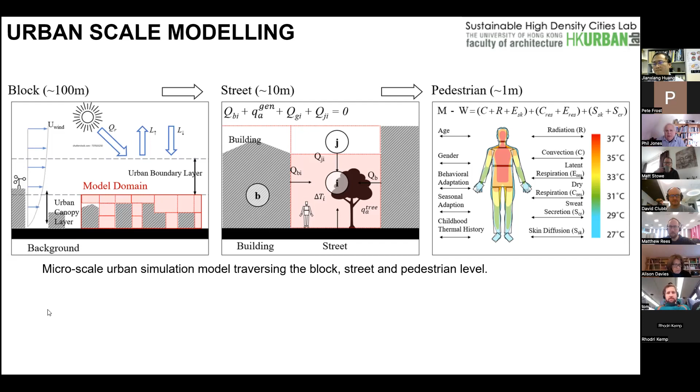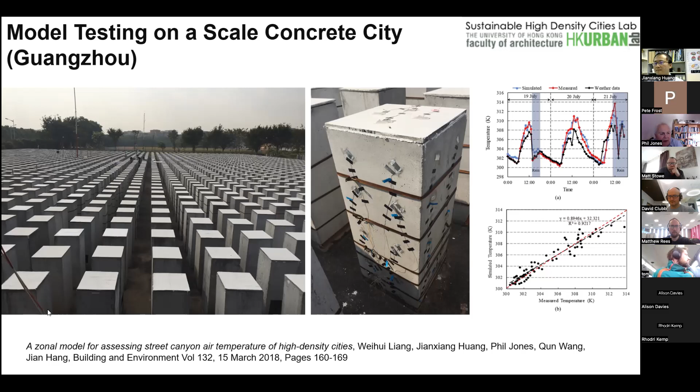We then went on to model the outside environment in more detail, and we took this area of Hong Kong, Sai Ying Pun, and we combined the energy model developed at Cardiff and the urban climate model developed at Hong Kong, and we combined these models so they exchange data at a regular time step of an hour.

The energy model provides the data on outside surface temperatures, and then the climate model takes those surface temperatures along with meteorological conditions from the local weather station, and we can predict the variation in temperatures on this particular urban block. And again, we were comparing measurements and predictions and got some encouraging results.

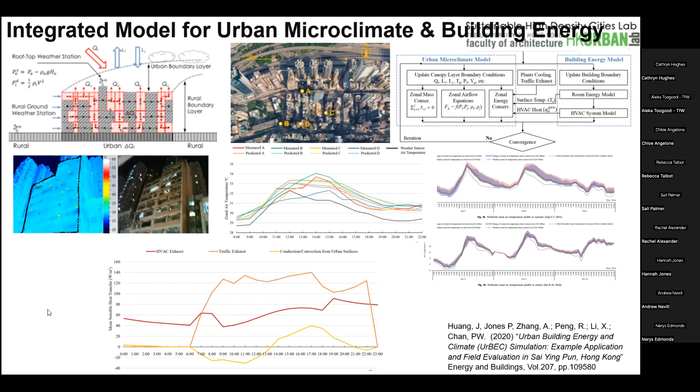Not only did we look at the weather data, but we also looked at the anthropogenic heat gain from traffic exhaust, and later on looking at the heat gain from the buildings themselves, the air conditioning systems, and restaurants within the urban block. Next slide, please, Jianxiang.

And this is expanding that to look at all these heat gains to the outside environments. Most of the modeling is looking at heat gains to the environment, but we also looked at the impact of green areas and trees on mitigating the urban temperatures. And we did some interesting modeling then to look at the impact of different types of features of the built environment on outside temperatures.

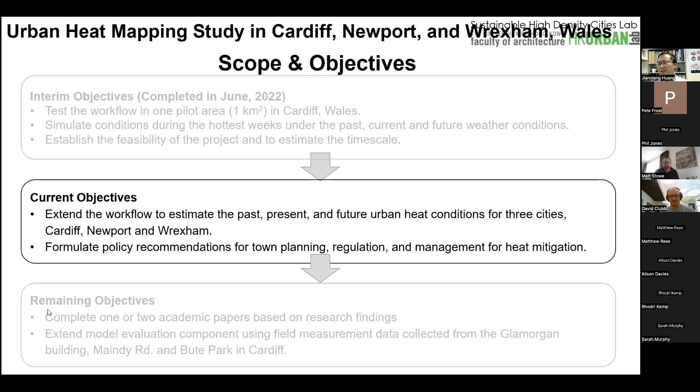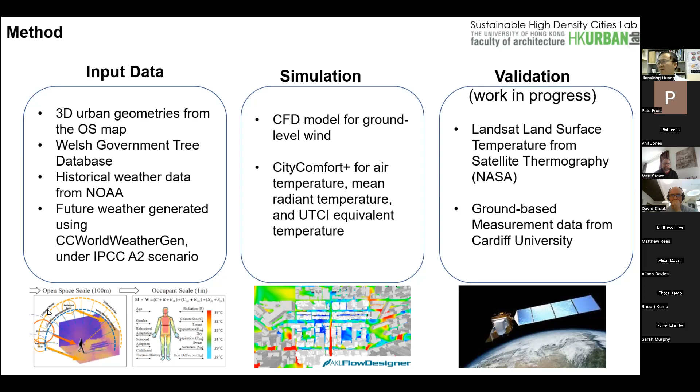So we delved into the methodology using a combination of modeling tools, using input data from the Welsh government, from NOAA, and from a variety of other tools to generate future weather, and also to review previous meteorological records. We're also using combined simulation tools and validation studies based on field measurement and Landsat land surface temperature data, etc. In the interest of time, I will briefly walk you through these 3 cities.

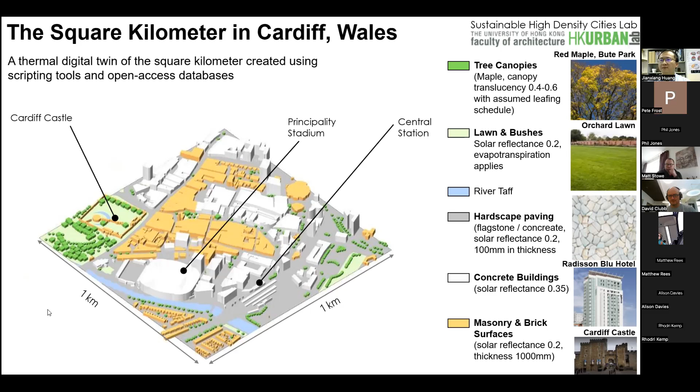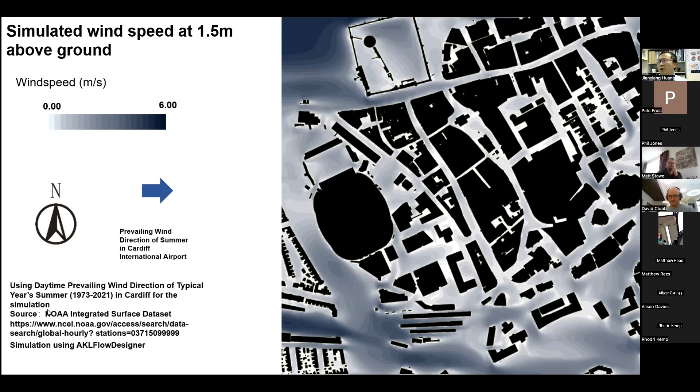First, we're looking into Cardiff, Wales, the largest city, and this is a square kilometer digital twin, as we call it, of the thermal properties, including the 3D geometries of buildings, built environment, pavement, vegetation, particularly tree canopies, obtained from the official database. And then we'll be able to run the model. This is one example of the wind flow, the wind speed at a pedestrian scale, 1.5 meters. It's roughly the height of a human shoulder, let's imagine walking on the streets, cycling, etc.

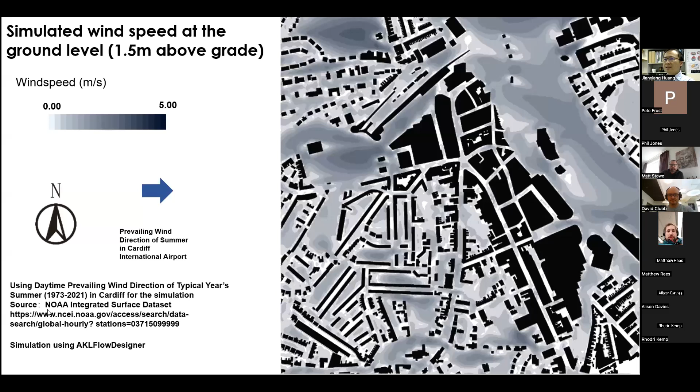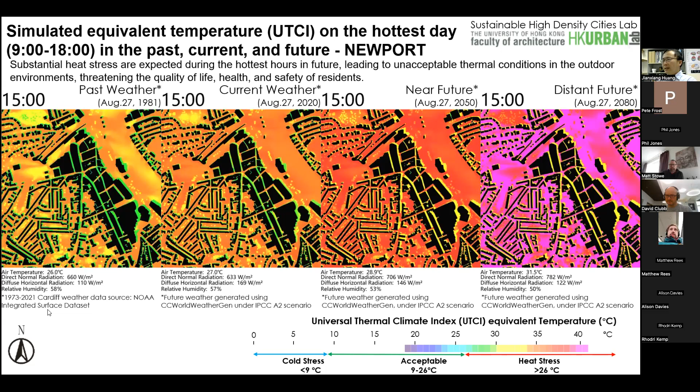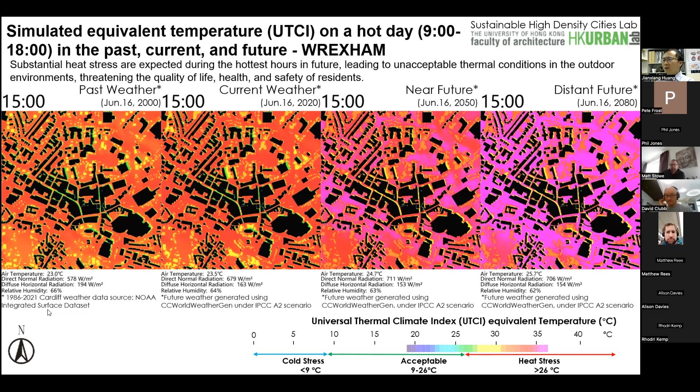And then we repeat this procedure for Newport, and you can see similar, consistent results starting from 9 a.m., with the heat stress gradually rising, and the same consistency in future heat stress as the sun keeps rising and the temperatures build up all the way till sunset. And the same for Wrexham, we repeat the same procedure, and you see consistent results, with the trend also indicating very high temperatures for those cities that we used to be very familiar with.

And then in terms of the implications, that really leads to some of the recommendations of what can be done. I can walk you through briefly in the interest of time. One of the most important lessons is the disparities in the simulated results. You would see that the cool spots are usually under the tree canopy cover, versus the hot spots, where you have pavements, hardscape paving, concrete or asphalt, and that usually increases heat stress significantly.

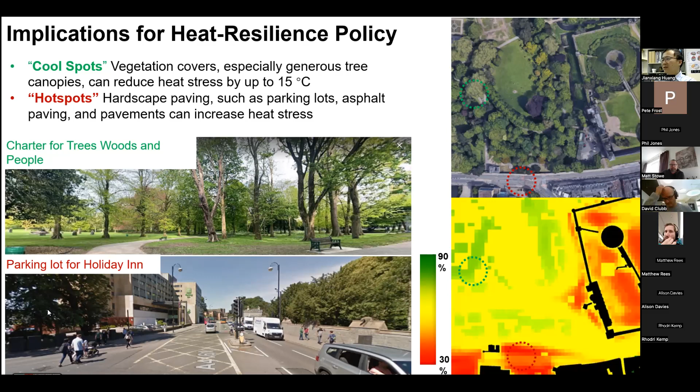There's a second implication, looking into the urban form or the orientation of streets, the organization of buildings. Typically, we find the cooler spots in the east-west oriented narrow alleys that provide shade and also channel the breeze from the westerly wind, in particular in the summer season.

The hot spots are found on the north-south oriented streets. Usually these are wide streets. They're just perpendicular to the wind, so it stagnates the airflow, but at the same time, it cannot shield the direct sun when the solar angles are high in the middle of the day.

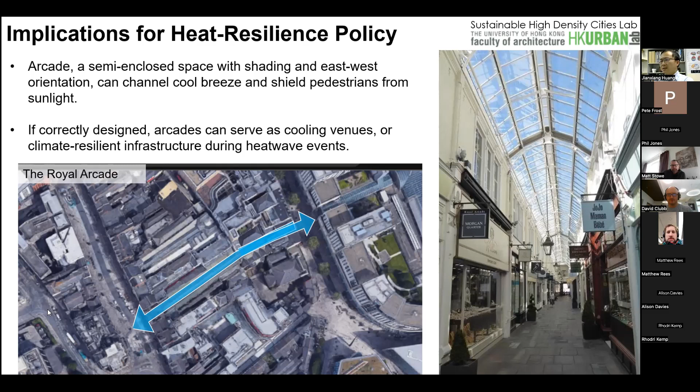And we found, that's one of the serendipities of discovery, this traditional arcade that is historical heritage that can serve as potential cooling venues. If they are naturally ventilated, you have the cool breeze seeping through, and they also shield pedestrians from direct sunlight. These are potentials to be used.

We're right now working on extensive evaluation studies based on field measurement. So this is one measurement spot. We have on-the-ground equipment measuring temperature, and we're comparing prediction and measurement and showing promising results, as this is one of the preliminary works that Phil and I are continuing to work on.

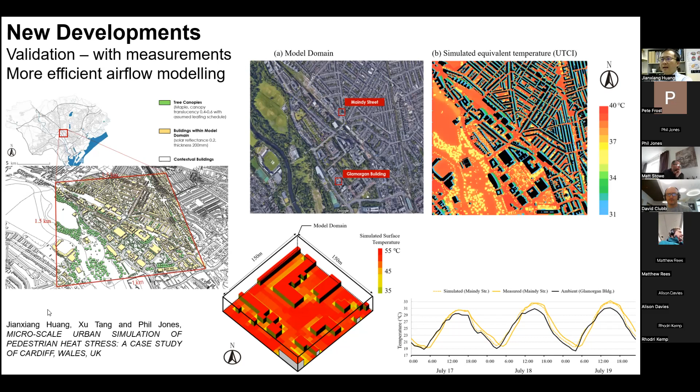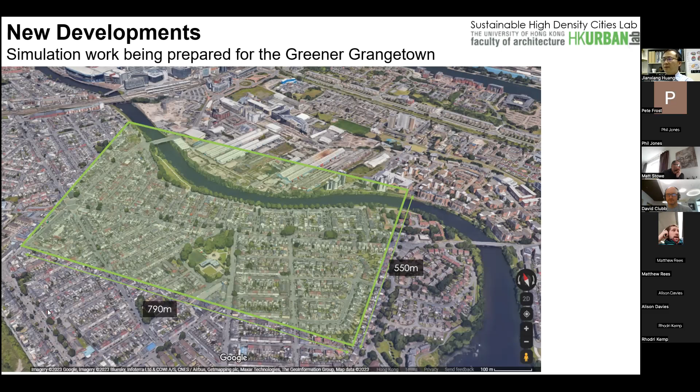We're also bringing this model to another location familiar to maybe some of the audience here. This is the Greener Grangetown, not far away from the square kilometer at the center of Cardiff. We're going to test the model to see the cooling impact of the vegetation, the tree canopies, in this much celebrated and highly publicized project, and then discuss the potentials and whether we can harness the cooling benefits, perhaps maximize it through a good combination, and also allocate resources wisely.

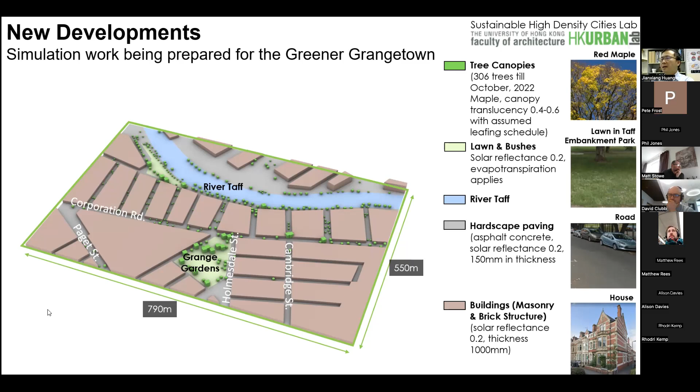Well, thank you so much for that, Jianxiang. That was a race through some quite amazing research that you've done. The computing power on that just boggles my mind.

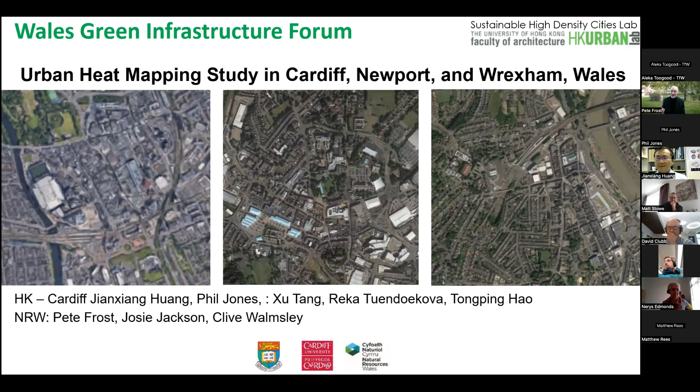Okay, great. My question was, just for context, I work for the railway, and Cardiff Central is one of the areas that we look at. We've got some weather stations, and during the heat waves in the summer, we noticed that the temperature didn't drop throughout the night, it stayed quite high, whereas you'd expect it to drop. So I was wondering, with the modelling that you did with the heat, is there any way you can factor that in as well?

Because normally the temperature drops in the morning and then goes back up in the day, and that process is repeated. So when you're looking at the future scenarios, can that be modelled in as well, with the temperature not dropping in the night? I hope that makes sense.

Yeah. Thanks for the question. I think that's a great implication. We noticed that warm nights, especially here in Hong Kong, are more detrimental to health when people are trying to get some good sleep at night, but the hot weather is preventing them from doing so. And to answer your question, yes.

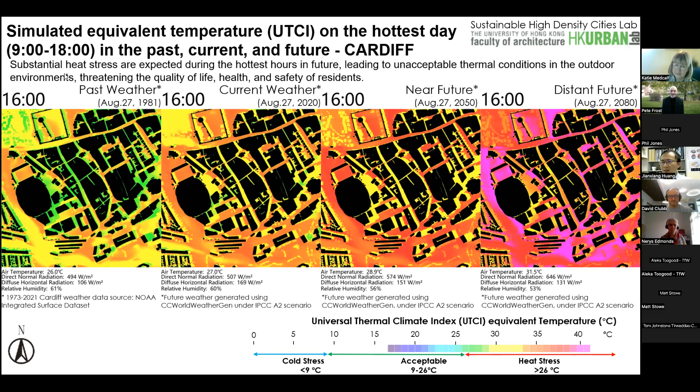I think Phil showed the slides earlier that we have a variety of measures beyond tree canopies, such as managing the anthropogenic heat from buses, from AC units, from people's homes. Or sometimes you have mechanical fans or the water spray, very fine water particles. And it's been done actually extensively in Hong Kong and in Singapore, those tropical climates. And then we found some of these measures would work very well, especially under the study conditions.

So our suggestion is that we have tiers of solutions, the toolbox, ready depending on the geographical location, the climate pattern, or the density of the cities. So these are critical factors that would go into deciding which items from the toolbox will work the best. Of course, there's also a cost-effectiveness equation to be taken into account. For instance, some of these measures could be expensive in terms of energy. The water spray would require a supply of clean water, and that may not be readily available in some dry areas. So these are also levels of custom-made solutions for individual locations. Thank you for the great question.